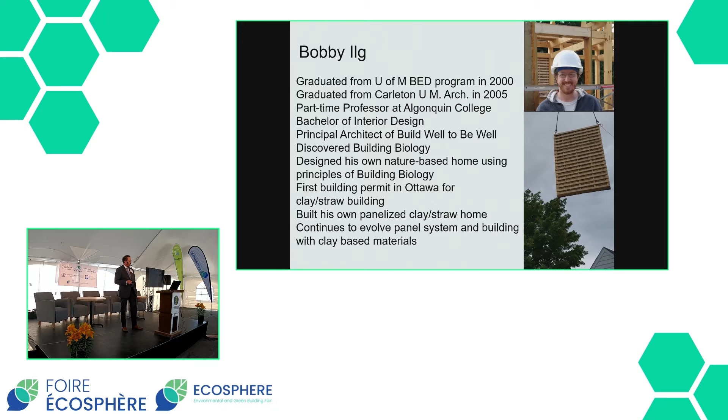So building biology recognizes that nature is the gold standard for a healthy human environment and the ultimate model for perpetual ecological balance. Building biology is unique in its emphasis on human health, with the perspective that there is almost always a direct correlation between the biological compatibility of any building material and its ecological performance. In other words, that which is truly healthy for us will also be healthy for the environment.

A lot of our clients actually suffer from a condition known as multiple chemical sensitivities. So they reach out to us and we do some consultation work there. That's what drew me a little bit into building biology. And as I dove into it, I realized they understood natural buildings in a way that I could appreciate.

So it's the first ecological building movement. It started in Germany shortly after World War II, and it developed as a series of professionals. We're talking doctors, chemists, builders, natural builders of all sorts, that started to look at widespread illness and building failure related to a lot of the new buildings that went up after World War II.

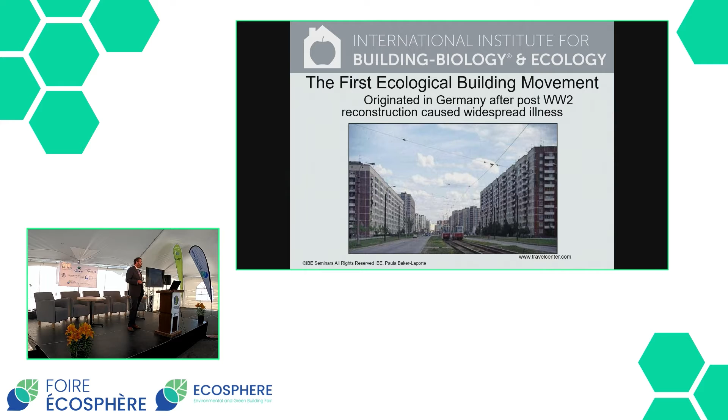They were also seeing some signs that this same building illness wasn't necessarily occurring in some of their older structures, and of course they had several to look at. So it started off as Dr. Anton Schneider, who founded an interdisciplinary working group for Healthy Building and Living in 1969. It turned into building biology in about the mid-70s, and Helmut Ziehe brought it to North America in '87, translating the German text to English so that more people could partake.

Right now there are building biology institutes on most of the continents across the world, so it's pretty well known now. It's a series of experts, architects, planners, wood scientists, medical professionals, and I've appreciated the amount of sharing that actually occurs in becoming a building biologist.

Part of that process was understanding that when I went to a lot of my lectures, a lot of the people there were looking for answers because they were suffering from chemical sensitivities or other building-related illnesses, and I was the only architect. After going through it, I would say I wish every architect and every designer had this, that it was more integrated into universities and colleges.

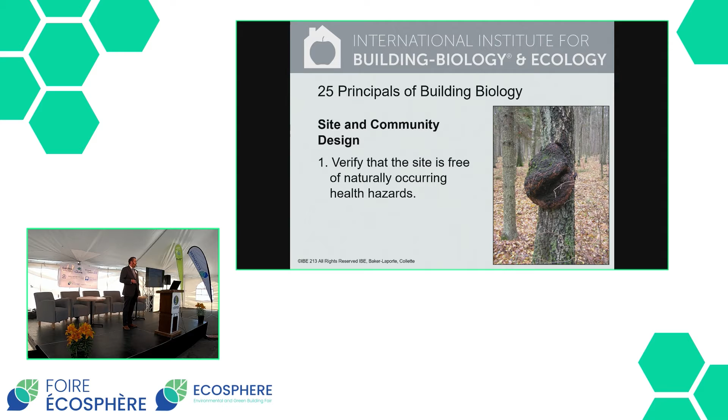Another one: place dwellings so occupants are undisturbed by sources of man-made air, soil, water, noise, and electro pollution. Very difficult to do in a city, but we try our best.

Place dwellings in well-planned communities that provide ample access to fresh air, sunshine, and nature. The photo you see is actually a planned community in Santa Fe, New Mexico. There's a lot of people living in this very dense area, but the idea is to have as much green space as built space. It's actually a very beautiful place to visit, and it creates that community aspect for everyone who lives there, because they're encouraged not to have streets, but pathways where they're walking and interacting with one another. And to plan homes and developments considering the needs of community, families, and individuals of all ages.

I always looked at the community design and community aspect of the building biology principles as nice, but I didn't really focus on their importance until quite recently. It was largely with the pandemic. Community is, I think, the base of everything when it comes to the natural environment and how we want to work in the environment or with the environment. It won't happen without community. So I do appreciate these first four principles on a much different level now.

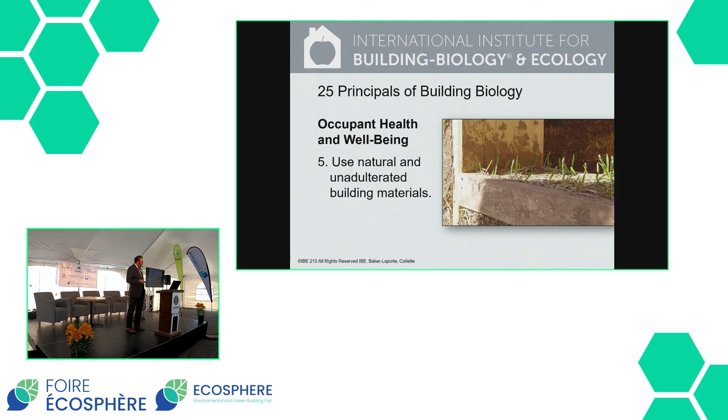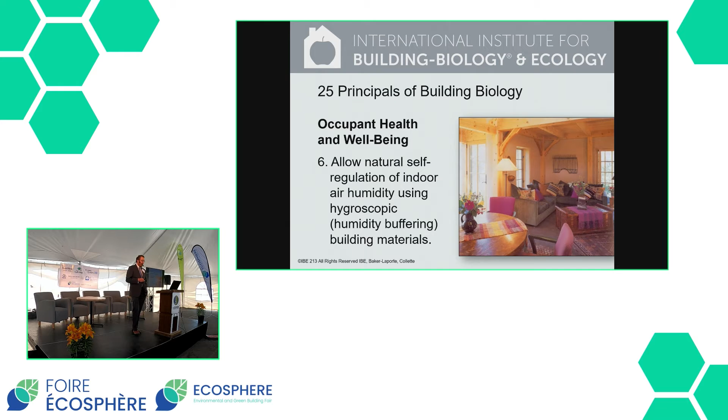Allow natural self-regulation of indoor air humidity using hygroscopic, humidity buffering building materials. I'll get into that a little bit later. That is one I do emphasize on.

Assure low total moisture content and rapid desiccation of wet construction processes in new buildings. Like clay and straw, it needs to be dry. And if you can dry it, that wall panel that took in 200 gallons of water will be able to take on another 200 gallons of water because it dried itself out once already.

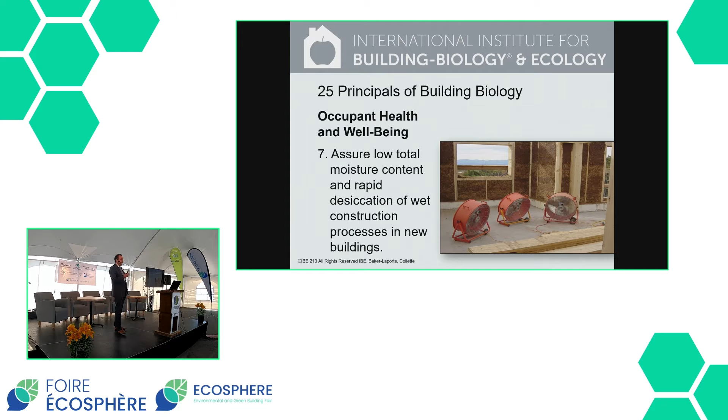It's wild, I've seen it myself. In my own house, I left the walls exposed for 3 seasons, and you'll see photos of it, but it looked the same the day we put it in after 3 full winters. It's amazing the way clay will keep everything else in that wall system dry. But the key is making sure it dries out properly the first time.

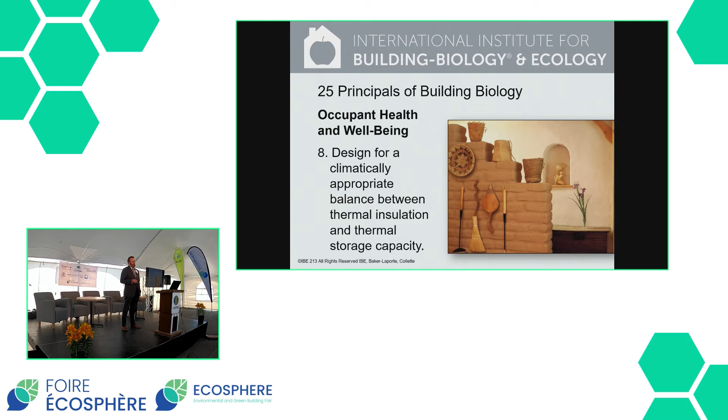Designed for a climatically appropriate balance between thermal insulation and thermal storage capacity, or thermal mass. I'll talk about this a little bit further as well.

Planned for climatically appropriate surface and air temperature. Again, how you heat becomes very important in the building biology discipline, and we primarily rely on radiant heat in all sources and forms. So I do emphasize that.

What you see in the photo there is a masonry heater. Has anyone heard of a masonry heater before? No? A masonry heater is a big mass stone fireplace. What's interesting is that the fire you light is one big fire. It goes up a series of channels and through the fireplace, either through horizontal channels or vertical channels. It can go through a heated seat like you see here, and then eventually it goes up the chimney.

I have one in my own house, and I did some infrared imaging to show you later in the diagram, but the masonry heater hits its hottest peak about 12 hours after the fire goes out. So with one fire a day, you heat up to 2,000 square feet.

It's remarkable, you don't smell it because it's burning all the gases from the smoke the whole way through. You see it at the very beginning, a little bit of smoke coming, and after that you just see little quivers.

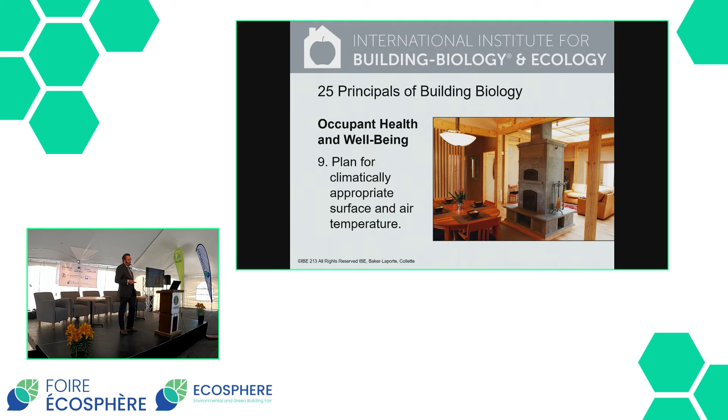This probably dates back to medieval times. China and Mongolia were heating this way well over 1,000 years ago, and it's pretty remarkable stuff.

Ten, provide for ample ventilation. As an architect, I know we've gotten into a lot of mechanical systems to provide fresh air. I'm a strong convert back to operable windows. Most of our buildings do not have nearly enough operable windows as far as I'm concerned.

I've come full circle and don't quite realize why we use electricity and energy to bring in fresh air. It's as simple as opening a window. And when you get your cross ventilation and everything else, it is much better for your long-term health related to that interior environment. So I do appreciate this building biology principle because I think it's very critical to the way we live in our buildings and work in our buildings.

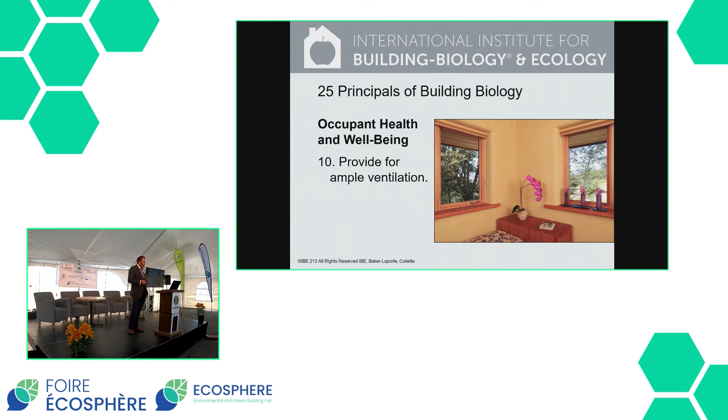Use appropriate thermal radiation strategies for heating buildings, including passive solar wherever viable. When you want to collect heat from the sun, you need something to store it. So that's where the thermal mass, that fine balance of insulation and mass, is really critical, especially for a climate like we have in Ottawa, where you get a lot of cold months.

Our house will be almost 5 degrees difference when the sun is out in the middle of winter. And we store a lot of that sunlight in our mass, both the floors and the walls. And it's remarkable how consistent the heat remains just by the sun coming out.

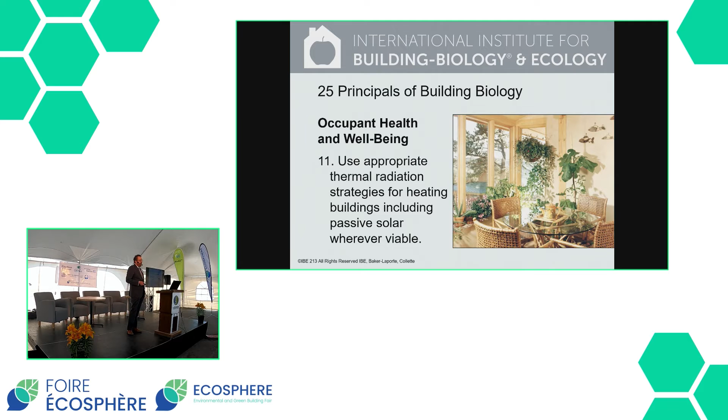I turn on my heat in November, we turn it off probably end of April. And the swing months are really the sun doing its thing. I have not overindulged in the insulation side of things. It really is the mass working with the sun.

So provide in abundance a well-balanced natural light and illumination while using color in accordance with nature. Provide adequate acoustical protection from harmful noise and vibration.

Can't stress this enough: a natural clay, or especially clay or a lime plastered wall, will have a little bit of texture on it, and that controls all the reverberation in your house. So the acoustics on a mass wall are phenomenal. It really is—

Once you live in it, it's hard to go back. I notice noises so much more now. And when you use radiant, quiet sources of heat and not forced air, you really gain an appreciation for the silence that comes with it.

Utilize non-toxic building materials that have neutral or pleasant natural scents. What you see here is a citrus thinner that is actually made from orange peel. So there are alternatives to what we have on the market today.

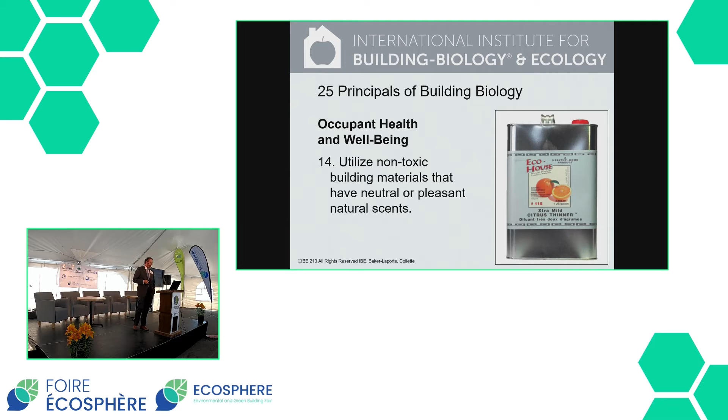And when you use natural materials, the big thing I have to stress is that when you use natural finishes for natural materials, they will always last longer. And there's science behind it, right? But yeah, it's simply forgotten. The chemical industry has really devoured our building industry, and for whatever reason, that's all we tend to see.

So, use appropriate water and moisture exclusion techniques to prevent interior growth of fungi, bacteria, dust, and allergens. Clay plaster—I'll be bringing this up a lot—controls the majority of the humidity in our house. When we have a shower in our bathroom, the clay plaster will soak up all the humidity, so we don't have a steamed up mirror.

We never have a steamed up mirror because the clay plaster on those walls soaks it up and then re-releases it again when it gets drier in there. So it's amazing seeing stuff like that work.

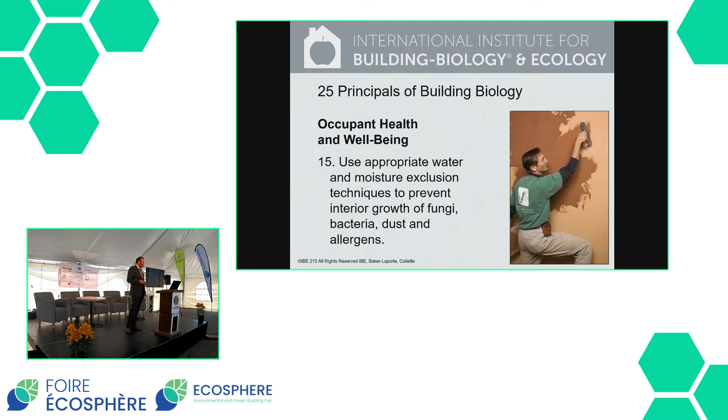Wood, untreated wood, will do a lot of similar things. It doesn't have quite as much of that hygroscopic capability, but it will take in a lot of moisture. So yeah, just by putting natural materials in, you can control your humidity significantly.

Assure best possible potable water quality by applying purification technologies if required. Water is my big thing, as you know, not only in the architecture, but in life in general. We can live without energy, but we can't live without water. And I don't know why it's not at the top of all the lists.

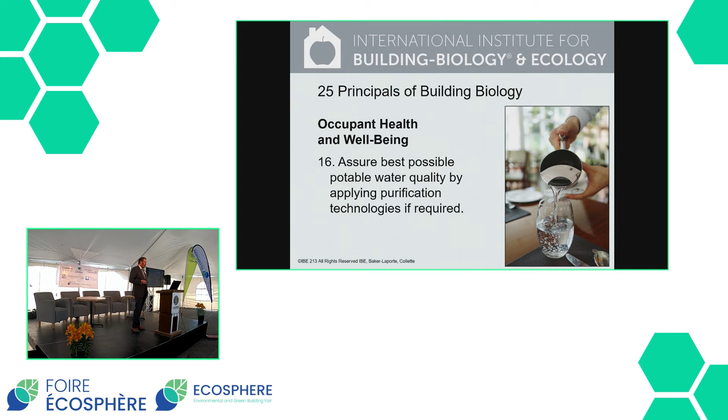Everything from the microplastics to the chemicals, pharmaceuticals, all the things going into our water systems. It's one of my big concerns, and one that I like to talk about on a regular basis, especially with students, trying to come up with better strategies. So I'm glad it is listed there.

Utilize physiological and ergonomic knowledge in interior and furniture design. Pretty straightforward. Consider proportion, harmonic measure, order, and shape in design. I think from a longevity standpoint, I always design buildings not for the next 10, 20 years, but what is it going to do in 100 years from now? Having proper proportion and something that is beautiful, people will take care of it, because all buildings need to be taken care of.

No matter what, if people abandon a building, it will fail and it will cease to exist. So if you make things beautiful, I do strongly believe that people will take care of it, generation after generation. So I do like that principle.

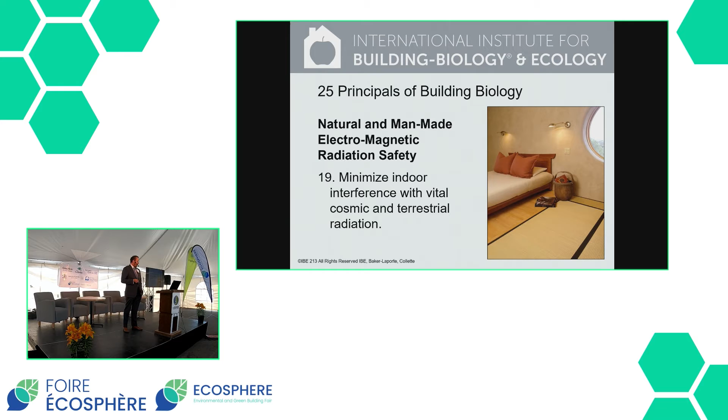They do talk a lot about natural and man-made electromagnetic radiation safety. It's one of the few environmental programs that actually look at EMR, but I won't get into too much detail today. Anyway, it's about minimizing indoor interference with vital cosmic and terrestrial radiation, and minimizing man-made power system and radio frequency radiation exposure generated from within the building and from outside sources.

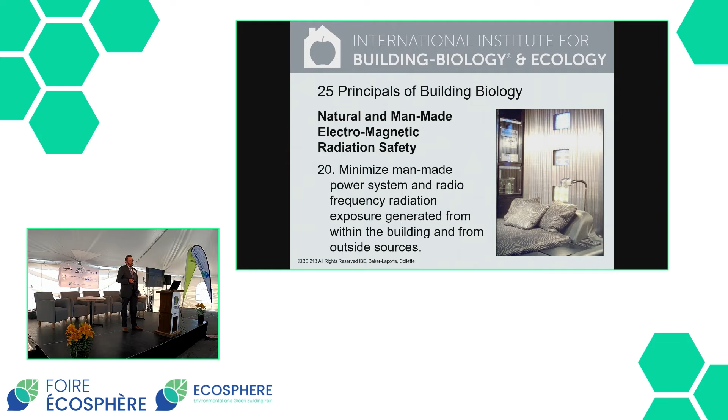Another one is avoid use of building materials that have elevated radioactivity levels. A lot of professionals and people in general don't realize that even something like a granite countertop can actually contain traces of radon. And when you seal it in with the sealants that are on those countertops, it is traceable and you can actually measure the levels. So if I have someone with really extreme sensitivities, we will test any granite or recommend other alternatives for that, so you avoid that. But it doesn't mean to say that by having granite countertops, you're going to have radioactive levels. It's just something to be conscious of.

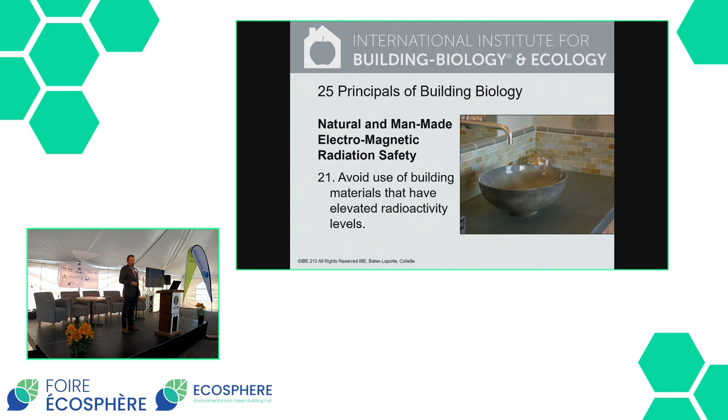Environmental protection, social responsibility, and energy efficiency. So construction materials, production, and building processes shall provide for health and social well-being in every phase of the building's life cycle. I can't stress this enough.

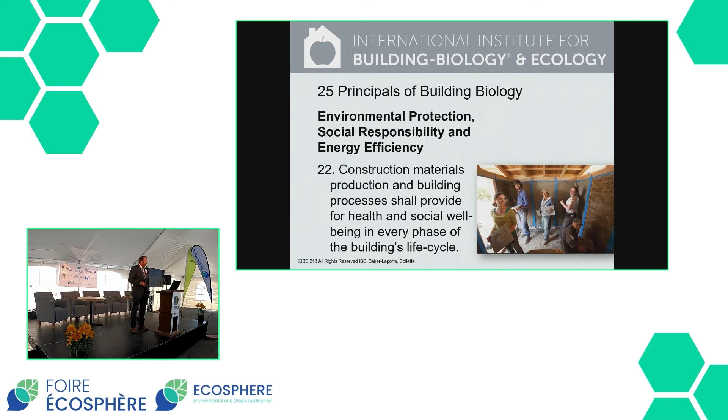When I build buildings, 95 to 99% of our buildings are biodegradable. What happens at the end of its life? It goes back into the earth again, where it came from. That, I think, is something not necessarily discussed on the full level.

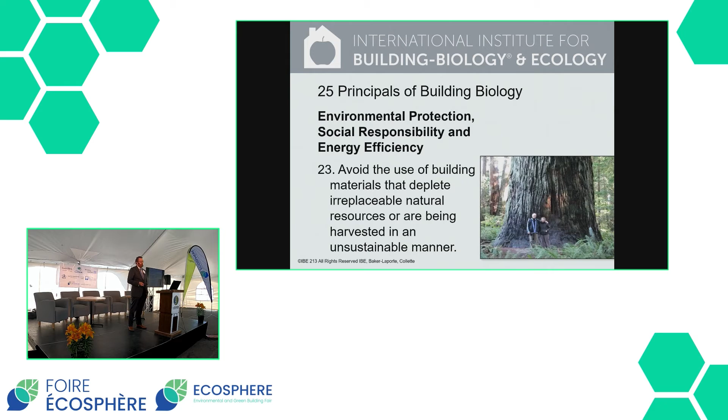Avoid the use of building materials that deplete irreplaceable natural resources or are being harvested in an unsustainable manner. I think we can all agree on that. Minimize energy consumption throughout the life of the building, utilizing climate-based and energy-efficient design, energy and water-saving technologies, and renewable energy. I love this one because it is the focus of my entire industry. And what I love is that it is important, but it's one of 25 environmental standards.

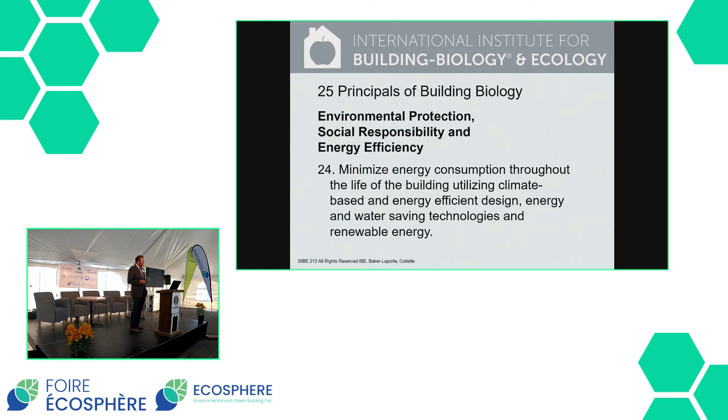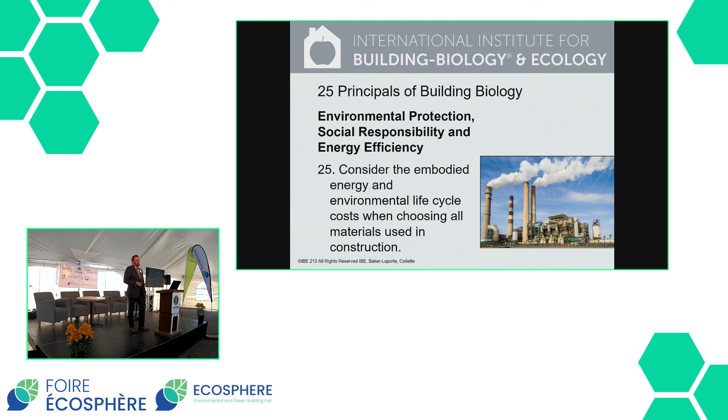And yeah, a big reason building biology started to resonate with me. Consider the embodied energy and environmental life cycle costs when choosing all materials used in construction. Where and how do those building materials come from, and where did they end up?

Now, our chemical exposure is across the board. We're exposed to so many different chemicals on so many different fronts. So I don't really get into that side of it. From the building perspective, the amount of off-gassing of materials is pretty intense. And I wouldn't have believed it until I had clients who can't go into a Home Depot without feeling really nauseous or sick. And it's not rare.

When we started building our house, a lady down the street came and talked to us because she went on her own discovery to get better like 20 years prior, and she understood exactly why we were doing what we were doing. So it's resonated since going down this journey.

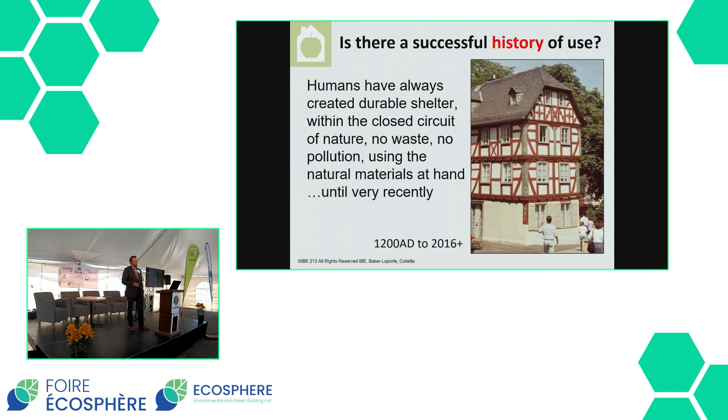Here we have a clay and straw wall. It was called wattle and daub at that point, filled in with a timber structure in Germany. It dates well over 800 years old and is still continuously inhabited. Yeah, there is a successful history of use.

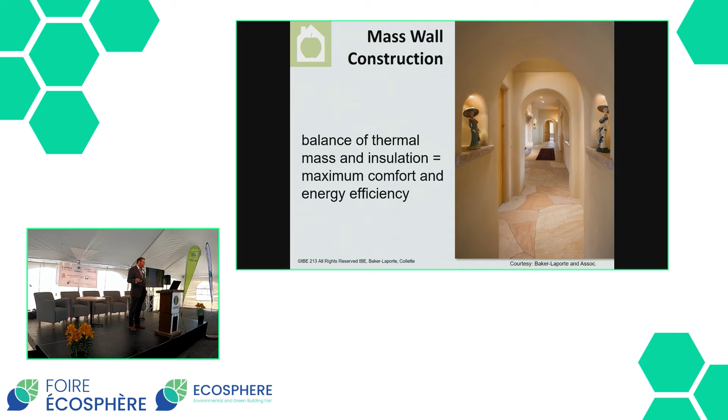I had a client come in about two summers ago. We had our windows open. It was about 11, 12 o'clock, and she had to put on her sweater. It was 35 degrees outside. Why she had a sweater, I don't know, but I guess she anticipated it was going to be chilly in the house. But it made her a believer, like, wow, this actually can work without air conditioning, which is something I've tried very hard to do in buildings. So mass walls will actually help with that.

Now we'll get back to this hygric buffering capacity, the capacity of a wall system to store vapor without deterioration or loss of performance.

What we see there are two photos, one of a steel structure and another of a log home. Now the log home, very similar to clay and straw, can take on a lot of moisture because those trees took on a lot of moisture during their life, and they won't deteriorate. So a log home actually works very similar to a clay and straw wall or any other type of mass wall.

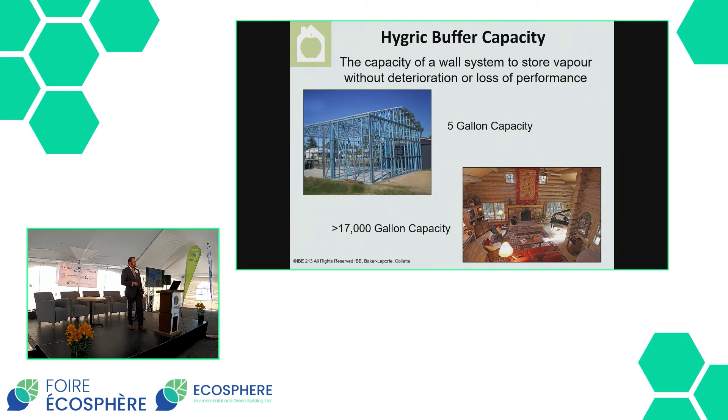So the steel structure, once you have the insulation and everything else, you'll get about a 5-gallon capacity of moisture that can sit in those walls without rusting the studs and everything else. On the log home, you're at about 17,000-gallon capacity. Clay and straw would be closer to 100,000 — the clay just can take on so much moisture.

So the building envelope is our third skin. This is a building biology kind of analogy, I guess. The first skin would be, of course, our lovely skin that we have on our bodies. It's pretty remarkable — when we get cold, we get these little bumps, called goosebumps. Those little bumps on our skin are actually air pockets, and they keep our body heat inside. So it acts as insulation.

Now, when we overheat, our skin will actually perspire and let moisture out to cool down our body. So using that philosophy, all the different skins we're looking at work in the same way. Clothing would be your second skin, and you can understand if your clothing is not breathable, it can really make it uncomfortable. The third skin would be the building itself, and the whole idea of the building skin is its ability to dry out again.

So the big thing with mass walls is to prevent the use of vapor barriers or a plastic layer.

I love that photo. You could imagine being inside that plastic bag. The humidity would just eventually, especially on a hot day, start to collect and soak and drip down the edge of that bag. I mean, we wouldn't do this — why do we do this? Vapor barriers cause a lot of failure in buildings.

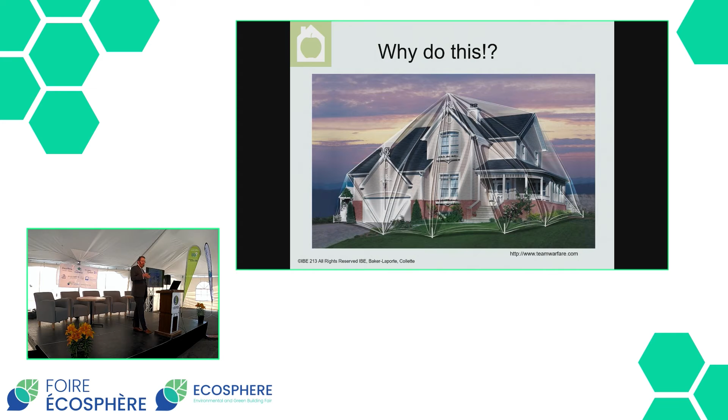It understands moisture. And that's the one thing vapor barriers do - they try to prevent moisture from coming in. The alternative is that they keep moisture inside the wall.

Now, we see this on most residential construction on the outside of walls. We put a vapor barrier and often very impermeable paint on the inside, and on the outside we have plywood and now often plastic insulations. So we have like 5, 6 layers of vapor barriers. And that's why we're seeing a lot of building failure inside there, because we are not allowing moisture to come out.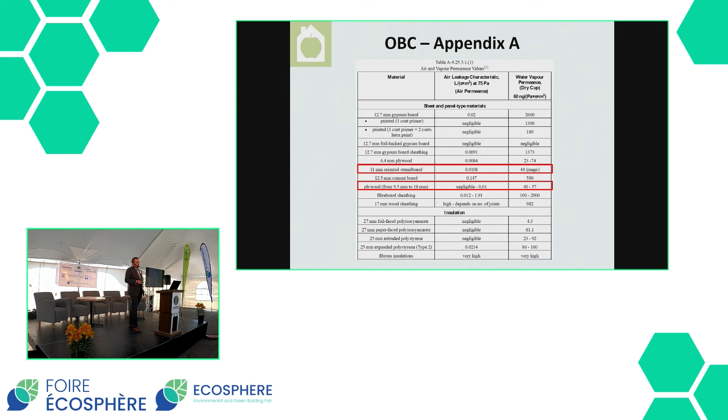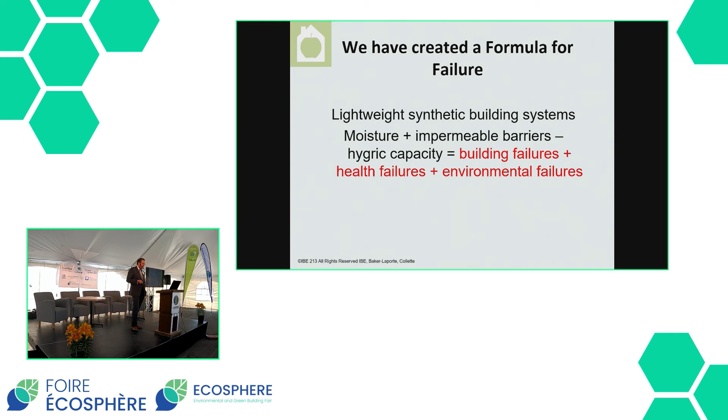So, technically we're building with a lot of materials that can't deal with moisture. So we've created a formula for failure: lightweight synthetic building systems, moisture plus impermeable barriers, minus hygric capacity - the idea that building materials should know and understand water, give water the respect it deserves - equals building failures, health failures, and environmental failures.

So if homes had labels, let's look at some of these chemical sensitivities and see the chemicals that go into some of our things. It would be frightening. It took the food industry a very long time to get labels. The building industry will be - I don't know if it'll ever happen - but if we did, you would see a lot of crazy stuff in that list.

It's wild. But sheep wool will contain, and we know this from clothing, 50% of its weight in moisture and still contain an R value. And as long as it can dry out again, it will maintain that R value. It'll never deteriorate. It is fire resistant, so it won't burn - it'll cinder a bit, but it's such a wonderful insulation, and we use it a lot in our buildings, especially around window openings and anywhere that there's going to be moisture. The sheep wool will soak up that moisture and keep the window jambs and our windows dry. And that's very critical to the sustainability of a building.

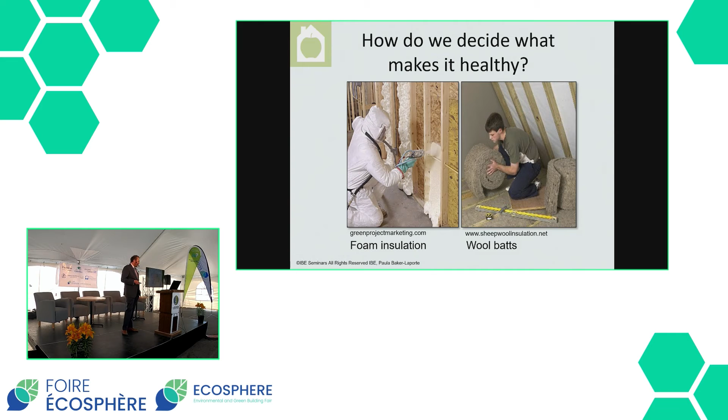Foam insulation sticks to everything, and if you're ever going to do a renovation in the future, it's really tricky to do. It works initially. I'd say from a long-term perspective, it does have issues. And of course, there's the off-gassing. A lot of my clients couldn't even live for 20 minutes in a house with spray foam. There is significant off-gassing. Well, the spacesuit might give you the first indication.

So staying informed is a swiftly moving target. We see here a crazy amount of different certifications and all sorts of different things on what chemicals should be allowed and how difficult they are to deal with. So how much do we really know? We really don't know very much. The EPA in the US in 1976 grandfathered in 62,000 chemicals into their industry.

The good news is that the EPA is now going to test them. But to test 62,000 base chemicals, we're talking thousands of years - it really would be tough. And that's testing one chemical and its problematic causes to one individual, or a series of individuals. It doesn't take into account all of the other things.

1 plus 1, what does that equal? If you have chlorine and ammonia - most Windex or window cleaners tend to have a bit of ammonia in it, and chlorine bleach is still sold in stores, stored right beside one another, often in our homes. You put them together and you get lethal gases coming from it.

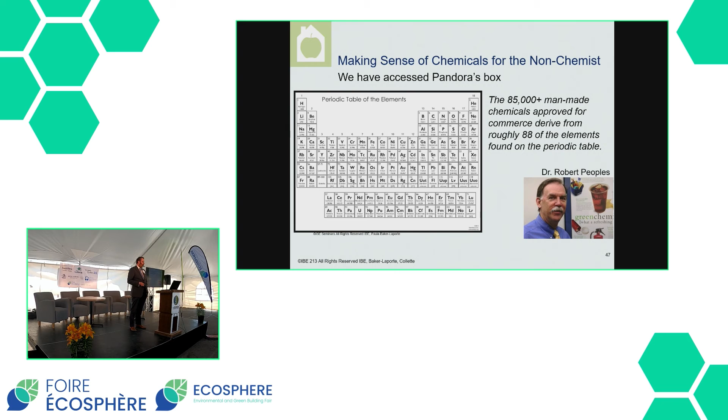So making sense of chemicals for a non-chemist - we have accessed Pandora's box. The 85,000 plus man-made chemicals approved for commerce derive from roughly 88 of the elements found on the periodic table. So nature, the gold standard, with a 5 billion year track record.

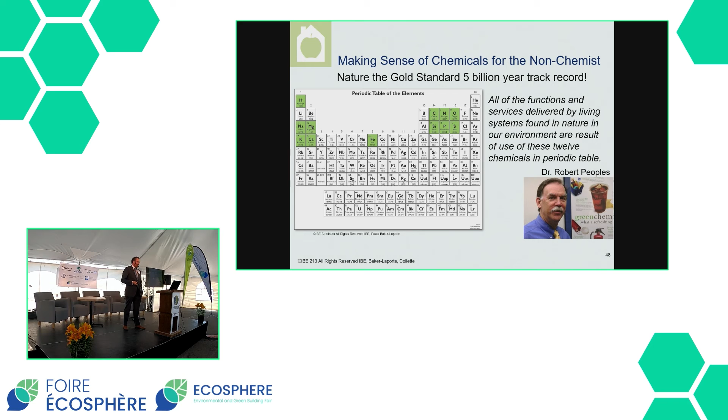All of the functions and services delivered by living systems found in nature and our environment are the result of these 12 chemicals in the periodic table. It's wild, 12. But yet we've introduced all these other ones. And even in the building industry, if you focus on those 12, the buildings will last a lot longer.

So there's a 6 classes approach - I'm not going to say it fully, but if you do have time at any point, look at 6 classes. It is a very, very good website that really looks at the different types of classes.

So there's about 5 minutes left. Again, when we're using chemicals, at what cost and to whom?

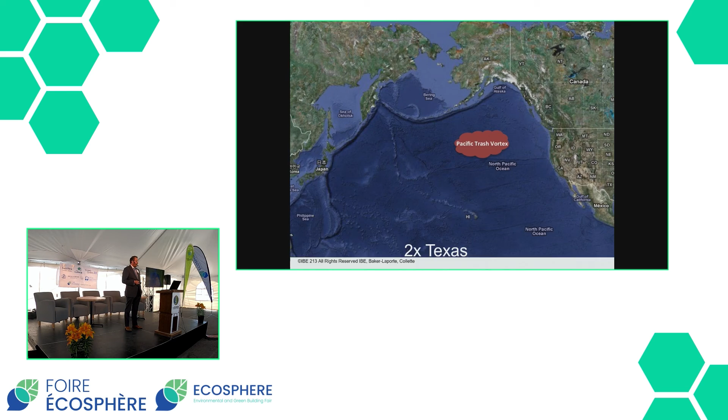So here you see a natural building going back into the earth again. It's starting to biodegrade, and once its lifespan is done, it goes back into the earth. Most of our other buildings end up in landfills. Has anyone heard of the Pacific trash vortex? It's gigantic - twice the size of Texas, and looks like this.

I'm going to go through and show you some photos of our house, applying building biology principles.

We were recently published in La Maison. There's a good article in there that I wrote with the editor from La Maison. This was the fall edition, and if you have a chance, there are some good insights in there.

So toxic-free, first do no harm. I try to use natural materials and things without the chemicals - that way I don't have to bother vetting it. A home will be successful to the degree that natural, unprocessed building materials are used to create it.

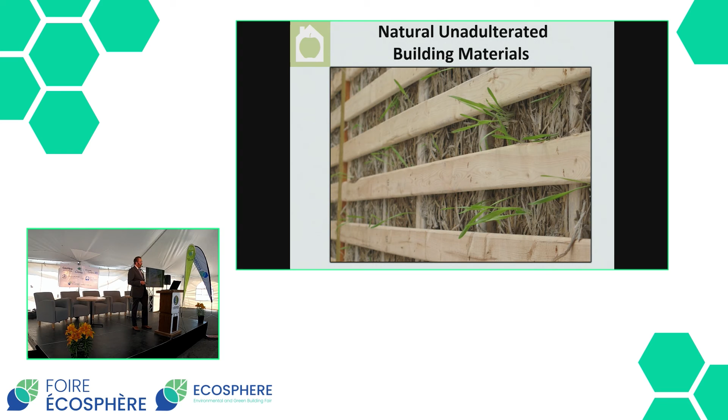This is our house. It is clay and straw. This is the sprouting that occurred from a lot of our wall panels. This is a picture during construction of our house, located near the experimental farm area in Ottawa.

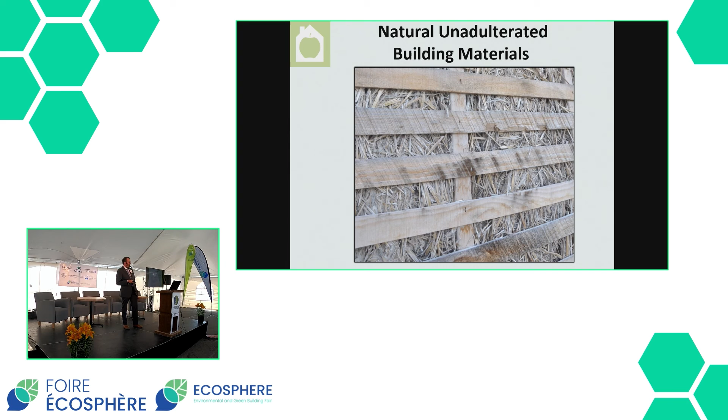This is a picture of our wall 3 years after we installed it. I left the walls exposed for about 3 seasons to see exactly what it's doing, and I was stunned - the clay straw looked like the day we put it in.

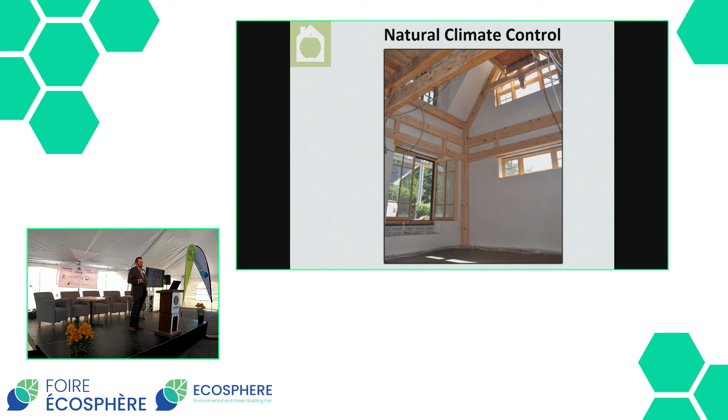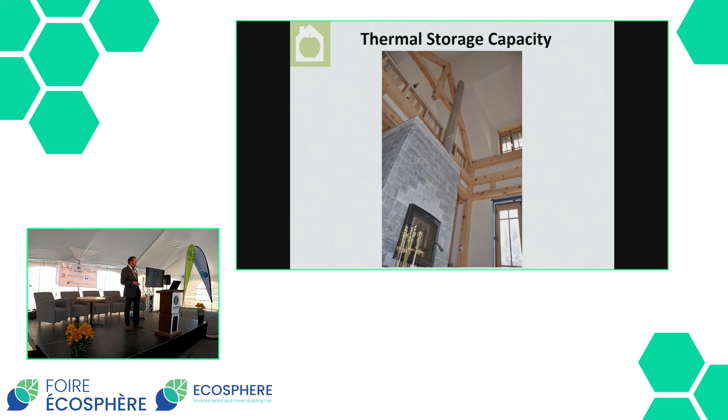Thermal storage capacity—this is a photo of our masonry heater in our main living space. I'll go through it quickly. I took some infrared photos, and you can see some of the temperatures here.

This is after the fire goes out. It's at about 108 degrees Celsius in front. After 3 hours after the fire goes out, it's 120 degrees Celsius, which is wild. It just gets warmer and warmer, and then eventually cools down again.

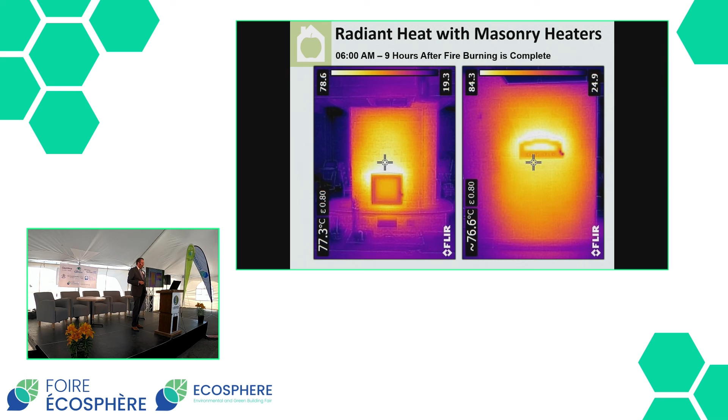What I find interesting is that it actually increases the wall temperature. That wall was 5 degrees warmer when these were taken at 6 a.m. in the morning. So the wall absorbed a lot of the heat from the masonry heater and got much hotter than the room temperature inside—it was actually storing it and helping us.

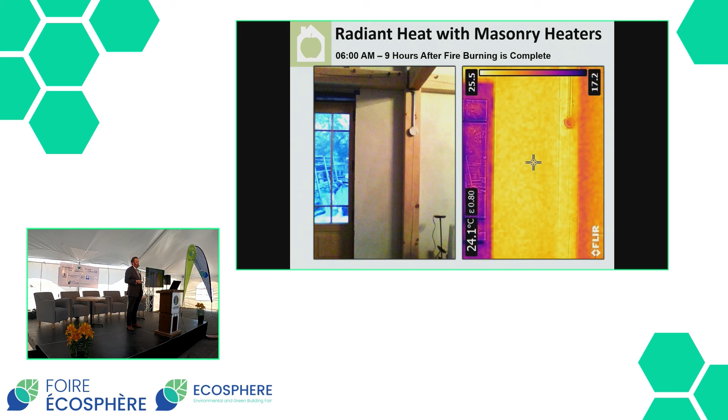Electromagnetic radiation—we talk a lot about that, especially with clients who have sensitivities. Natural daylight, I can't stress this enough, it's free. We should be stressing as much natural daylight as possible.

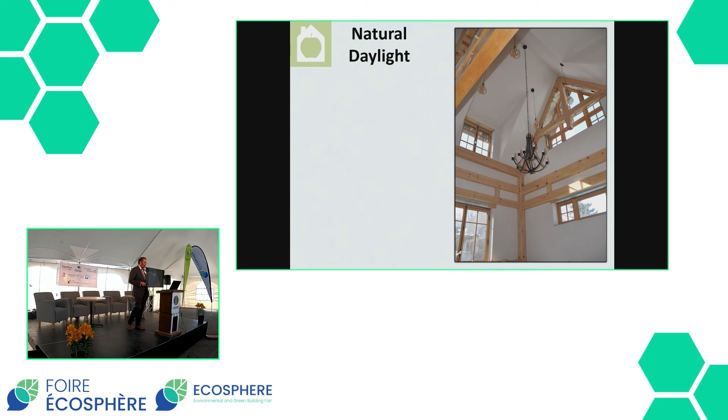A big thing I try to stress with all my clients is bringing them outside. Let's design some exterior spaces, because well-designed exterior spaces will be used a lot more than interior spaces and cost a fraction of the cost. So I emphasize a lot on exterior spaces.

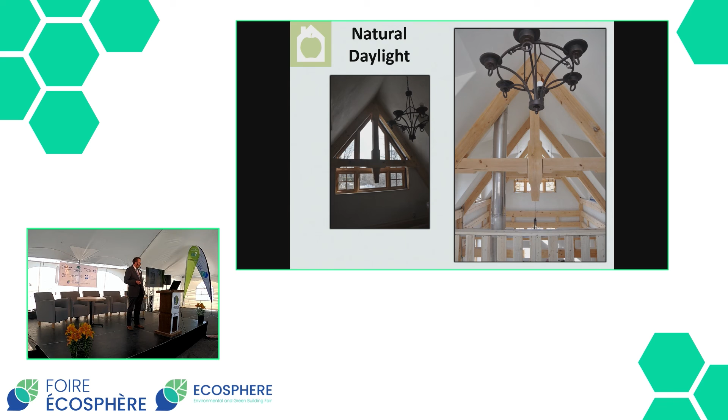A few more photos of our 2-story space showing natural daylight. Lighting inside—lighting is very big for me. In residential construction, I've completely moved away from LEDs and gone back to incandescent.

It's largely for the light quality. We get a little bit of energy savings on the LED side, but the quality of light is night and day. In the evenings, when you need to calm down, incandescents are like candlelight—it really does help. But most people want to look at those energy savings.

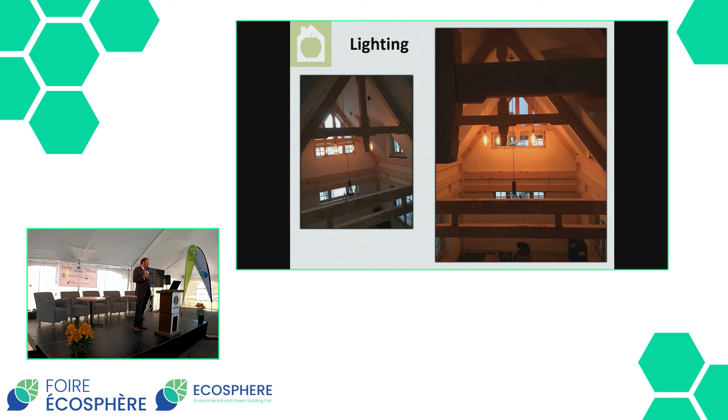If you look at the energy heat you get from the incandescent, it warms you up too, so there are arguments on both sides. Color and pattern in accordance with nature.

It's like a First Nation community in the U.S., near Santa Fe, New Mexico. It's up in the mountains, about 7,000 feet above sea level. The photos you see here are of it, and it dates back well over 1,000 years, so it's a heritage site.

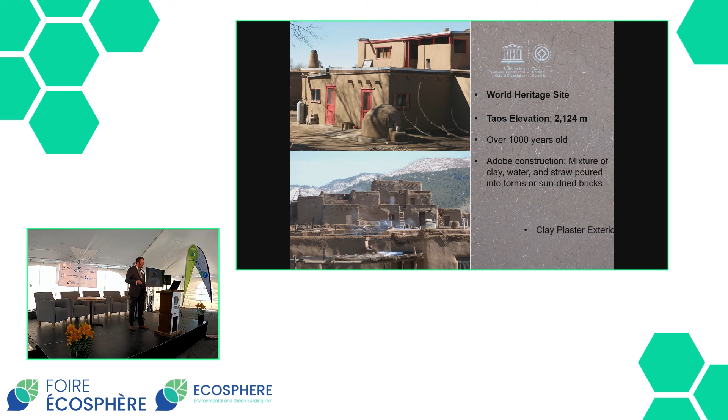World Heritage—Taos elevation is about 7,000 feet above sea level, so it gets very cold. It's over 1,000 years old and has been continuously inhabited; it is the oldest continuously inhabited community or buildings in North America. It's adobe construction—clay and straw, a mixture of clay, water, and straw poured into forms and sun-dried into bricks—with clay plaster exterior, and no plastics in these buildings.

Taos Pueblo—when you see it in person, it's hard to argue with something that's lasted 1,000 years and still maintains the structure and everything else it was intended to do.